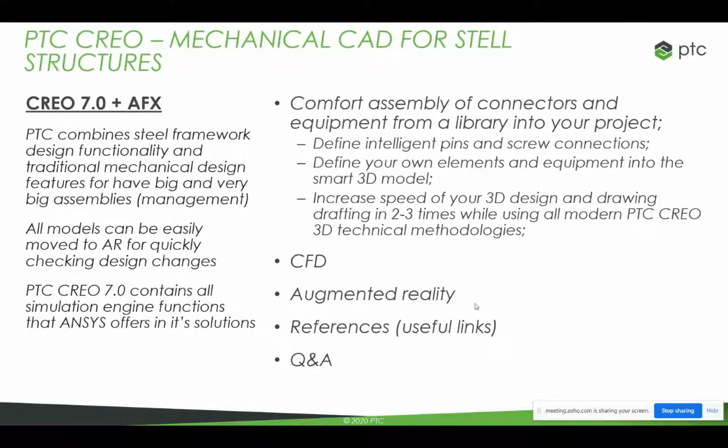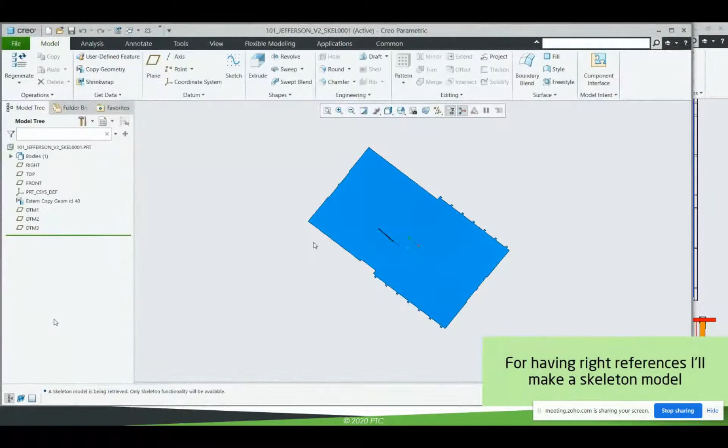Again, what you can see here, you can see the building layout. Let's suppose I have it from one of the constructional CAD. Here, I do have a quite tight or close equipment configuration scheme. So I have equipment on the floor. I have the stair, which I want to use, and I want to make an additional steel podium, which will be like the next step for people who are going up to the first level of this stair. Actually, that is a very large assembly because it contains more than 1,000 parts in it.

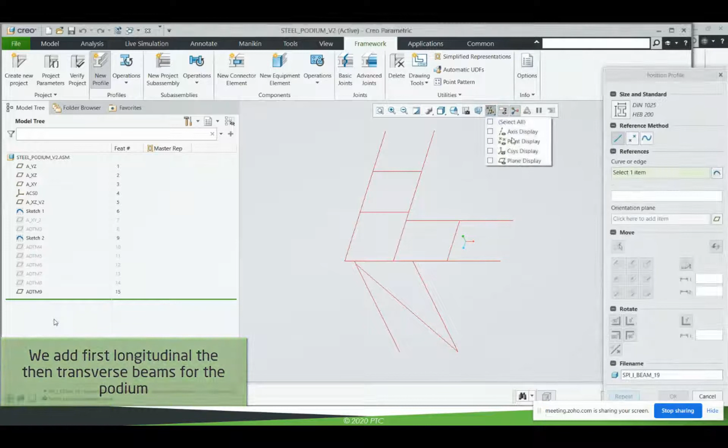And in Creo, PTC included a special design technique, which is called top-down design. Actually, we are working with the skeleton. But again, we will come to this a bit later. Here, I start to work with my podium. As in any CAD, I will choose some curves or sketches, as we call them in Creo. And then I choose the necessary profile for my beams. So I will have several beams for the podium.

And now I'm adding this beam while I use this special extension. This special extension you can see at the top level of my screen. That is called framework, because again, Creo originally is a mechanical CAD. So here I'm adding some extra lines. Again, this stuff is very similar to...

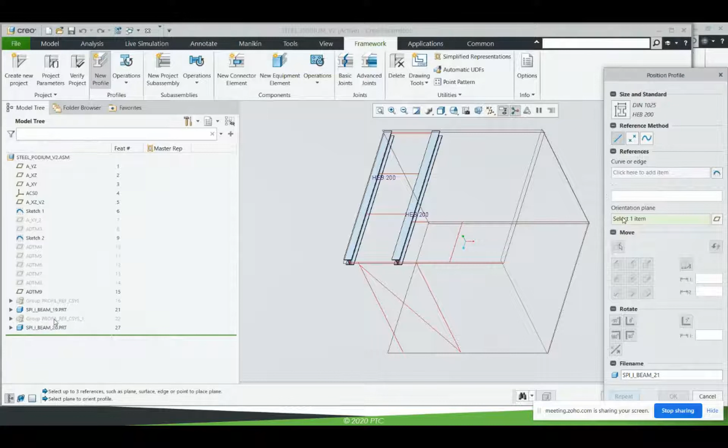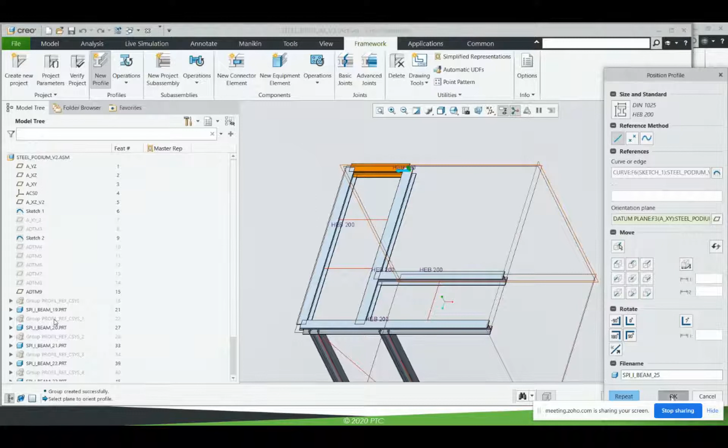We have a special principle in Creo, because we believe that as a mechanical designer, I must have the exact geometry. What am I doing so far? I am just adding beams here. I will do this for the full podium. Again, I have I-beams for the longitudinal directions. After that, I will add some transverse beams or channel beams to have them together.

The trick here is that everything Creo does for you on the screen, it does like you have it in reality. So it's not like a beam representation. Yeah, we do use curves, we do have some beams, but we will have the true geometry like it will be in reality.

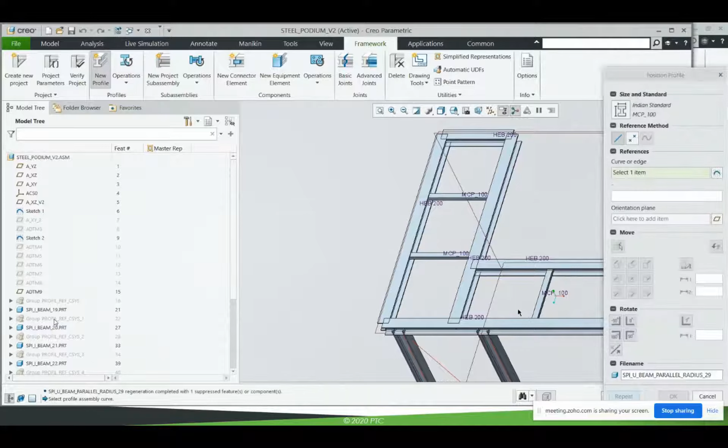For example, now I'm adding this channel beam. Once it's done, I will have the full geometry together with parameters. What does it mean for you? It means you will have the geometry like you have it in the real project. If something intersects here, it will intersect in reality.

Like now, for example, I am adding the diagonal beam, and you can see on the screen that it intersects with some of my I-beams. It will happen in reality.

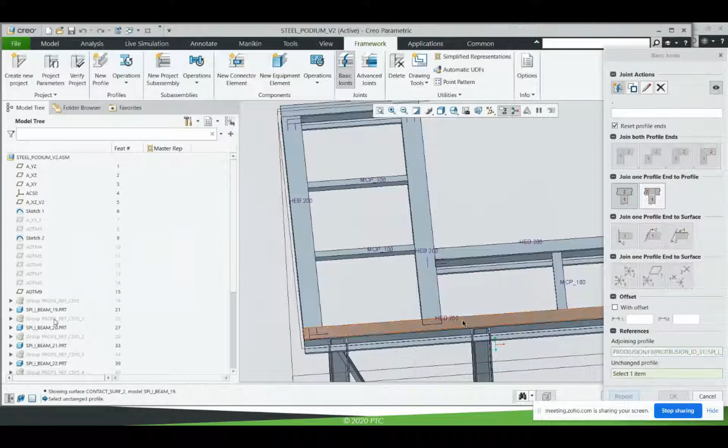So now my job first is to make joins, and then I will add several connectors here, like special steel construction elements. So far I'm adding joins here. After that, I will add some fixes or screws and nuts here. Again, we will see how Creo can work with these connectors.

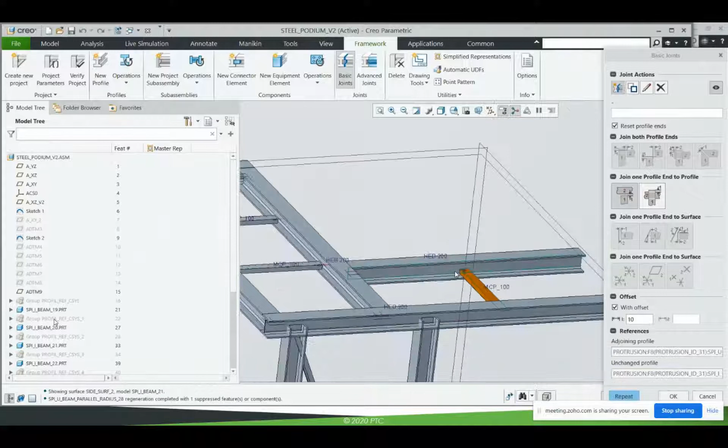Because my aim is to have at the end several drawing tables which will let me know how much raw material will be used, what kind, and what cuts have to be made on the manufacturing floor, on the constructional side. In order to have this, I must have the true geometry, because everything on the drawing for the orders to our suppliers will be automatically calculated based on our design project.

So far, I'm adding joints. Actually, it's not the joints, I'm aligning my channel beams with the level of my I-beams.

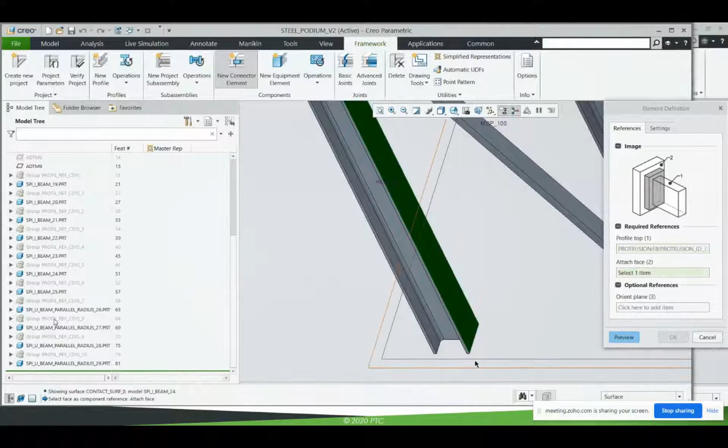Again, I am going to have a podium which will not be alone on the shop floor, but integrated together with the stair, and it must not intersect either with the stair or with some constructional parts like constructional beams. And again, it must go slightly above my equipment, because I want this podium for service purposes.

When I'm adding these connectors, you can see how Creo works. I'm placing the right surface for intersections, and Creo just makes the necessary corrections for the beams, and it's adding all kinds of these connectors.

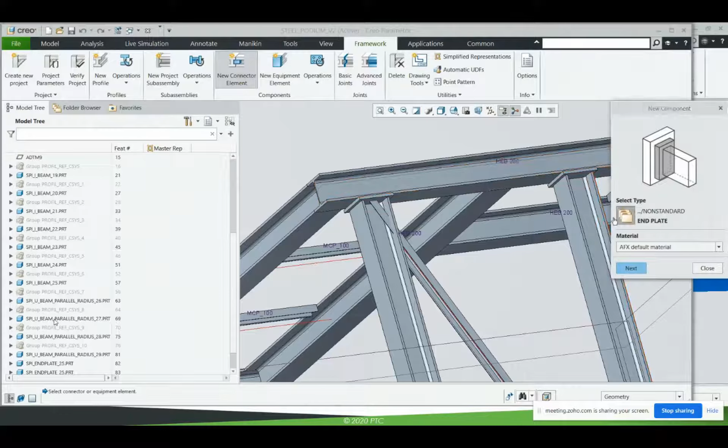So it's done by Creo itself. It calculates what kind of geometry you will have at the end, and it makes for you the full 3D modeling, which is like having the real podium when people will start to build it.

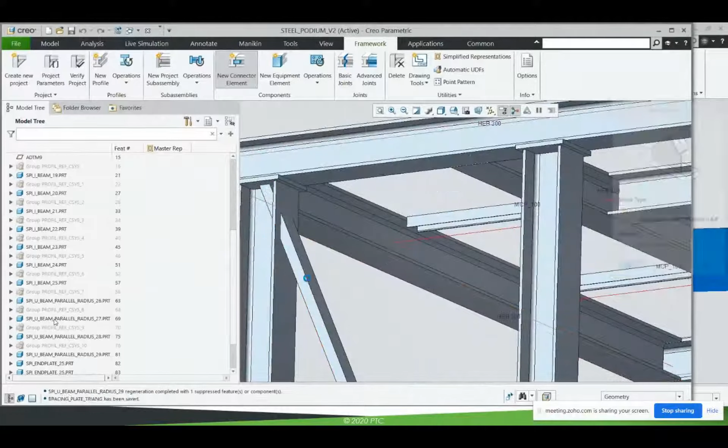Again, I am choosing special connectors for my diagonal beam from one side, and from the left side I am doing this again. So it looks like I have everything in terms of the connectors, at least for these diagonal beams and transverse beams.

What I am doing right now in Creo is choosing a layer which I have automatically, because as Creo, as AFX, added these connectors, it's also adding all necessary points for my screws.

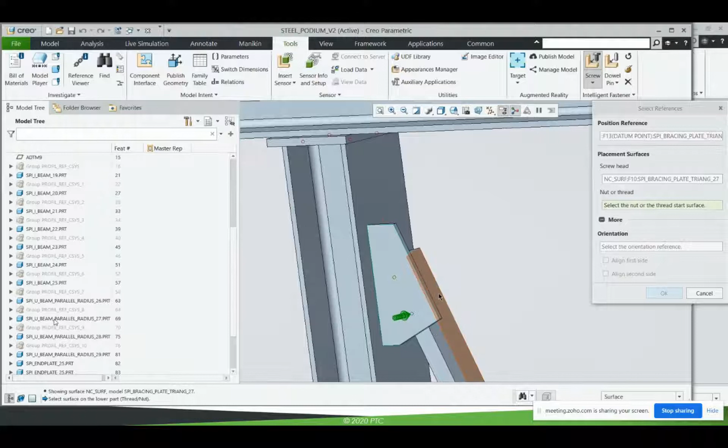What I am choosing here: I am choosing one point, and two surfaces, from one side and from the other side. I am choosing from the library the necessary screws, and Creo does the rest of the job for me. So it makes the holes, it places the screws, it places nuts.

So all of these are real models, not just a representation. You will see how this stuff can be used afterwards when I go to the drawing and the BOM management. But so far, please just note that all the geometry, all the models, were modified.

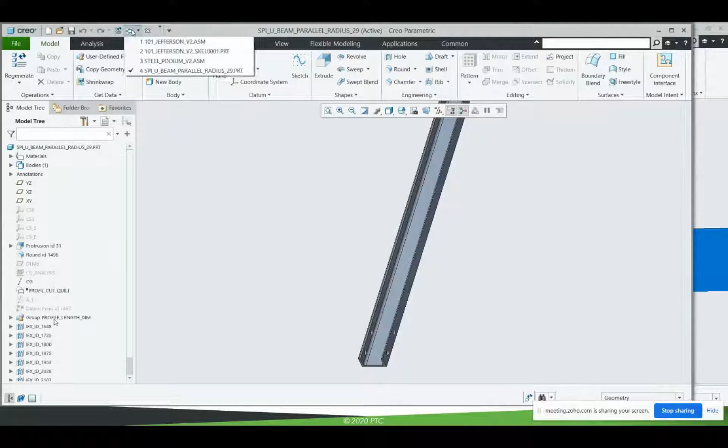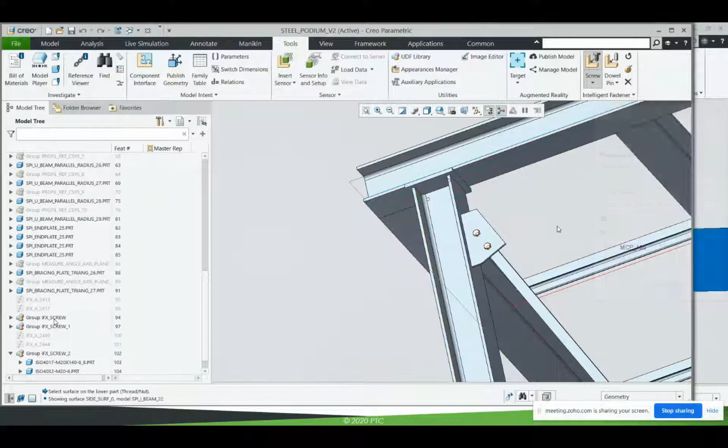So as far as I placed the screw, Creo made a hole in both parts, and I have this as a model for the screw, with parameters like the name and the library specification. By the way, if you have your own libraries, like your internal enterprise library, they can also be inserted and used by Creo, but everything is added in terms of screws and connectors.

I added also some screws and nuts for my beam. And now I want to have some additional connectors which would connect my transverse beams with the longitudinal beams.

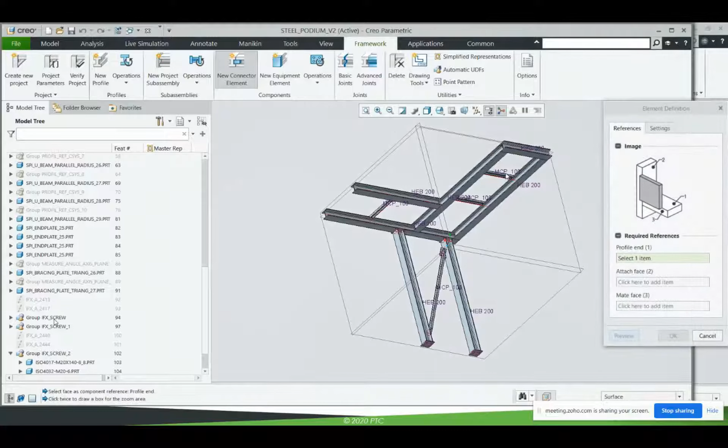What am I doing here? I am using the same approach. I am selecting the right surfaces for the placement. I select the right specification for this joint, and now I'm just repeating this connector to the other parts where I need it. Besides that,

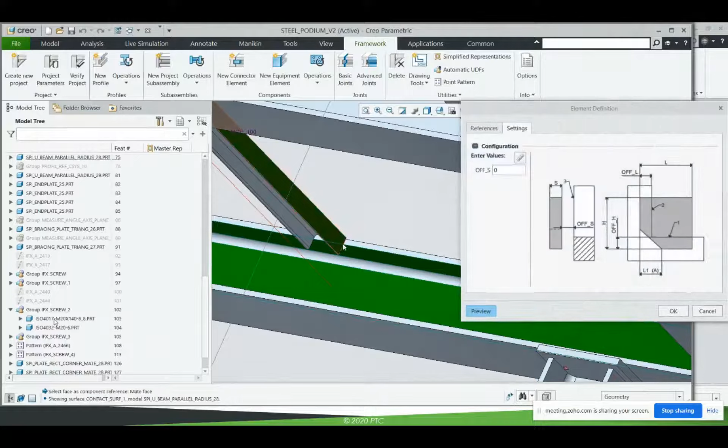in the same way, you may have weldings in case they are used in your projects. So far, I'm not using any weldments directly in my podium. So I will add these connectors for the transverse beams, or for the channel beams. And then I will go to the connectors for the longitudinal beams, because there is something interesting that I want to show you about how Creo does it.

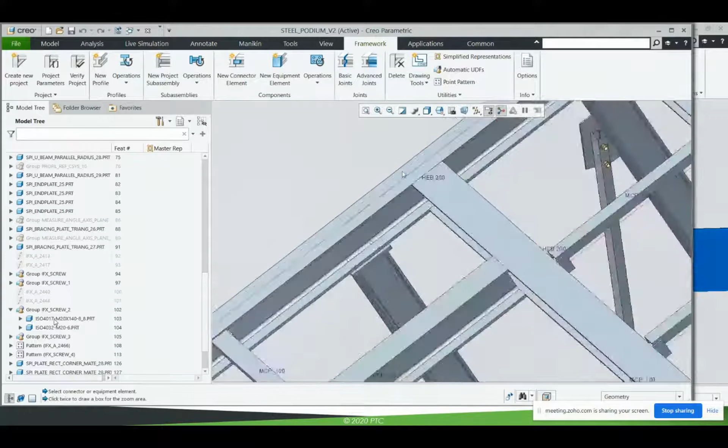Again, I need a special connector to connect these longitudinal beams. I select it from the library and select the exact placement for this. I select some screw size and hole distance information, and please notice what Creo did so far: it extended the beam up to the right position, as it should be in reality. This means I will have on the drawing the cut length table, and Creo will calculate all this stuff and include it there.

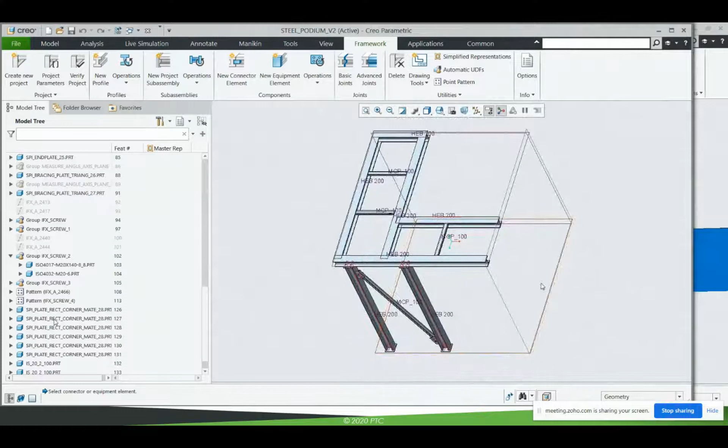That is the advantage of the full 3D model instead of, for example, some kind of geometry representation for the beams, because everything that you have here can be and must be used when you go to your manufacturing floor. It will be used for the calculations of raw material and necessary stock information. So everything will be used from your model. That's the main paradigm behind Creo: first, you do the full 3D model together with parameters.

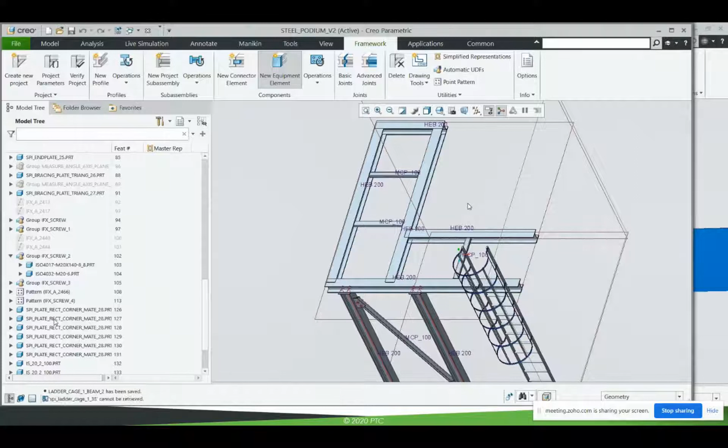So far, by the way, I'm adding here some kind of equipment. I want to have a ladder, so I place it. And now I will add the cage for this ladder, just to make it a bit convenient for the service people who will use it afterwards. As long as I have it in the 3D model, please notice on the left side of my screen that everything is added as parts and sub-assemblies also. So I'm not just having this kind of geometry; I have it as a full information object which can be managed afterwards.

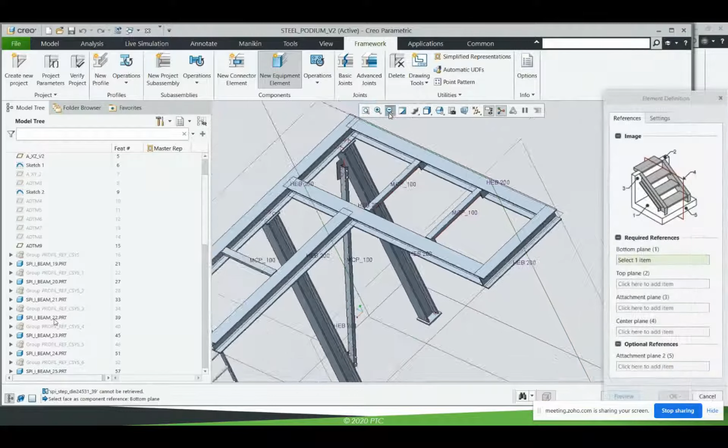Just imagine, so far I'm placing my stair. I need a datum for this, or the plane where I will have my stair. But in reality, it will not be just the stair. It will be a sub-assembly that will be used for all your next steps, like making some drawing, purchasing this stair, or making a manufacturing order to produce it. So it must be a sub-assembly, placed with some rules in your project.

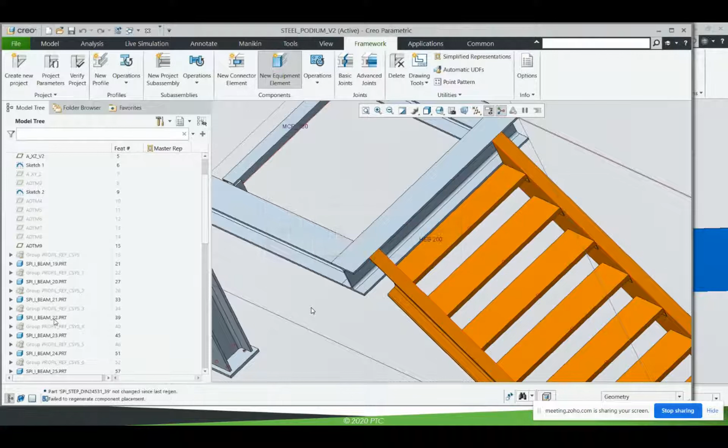Here you are not the one who has to think about this all the time, because all this work is done for you automatically by AFX and Creo. When you do usual mechanical design, for example a reciprocating engine, all of this work is done by a designer. Here, AFX or framework design in Creo does it for you. For example, here I am not really satisfied with the steps length, so I am changing it, and AFX in Creo rebuilds this model automatically. By the way, this procedure

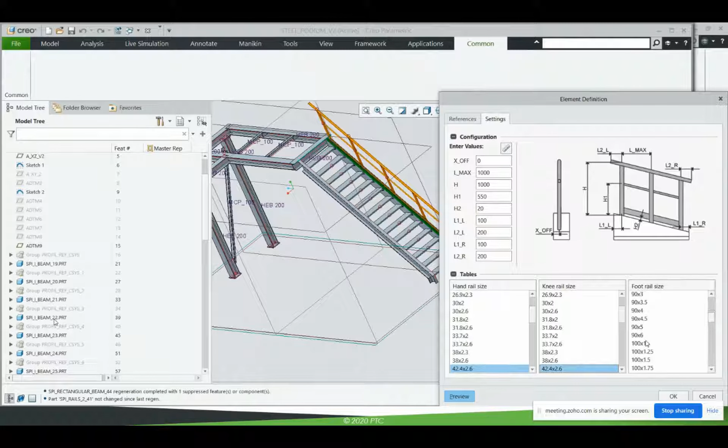is named in a special way, and we call this regeneration. So whenever something is added to the project, Creo regenerates it, or recalculates all this stuff, because again, the main paradigm here is to have the full 3D model like it will be in reality. So if we have to make a cut for the beam, it should be modeled. You must have intersection between some beams, but you must not have any kind of intersection between, for example, your framework design, between this podium and some kind of equipment.

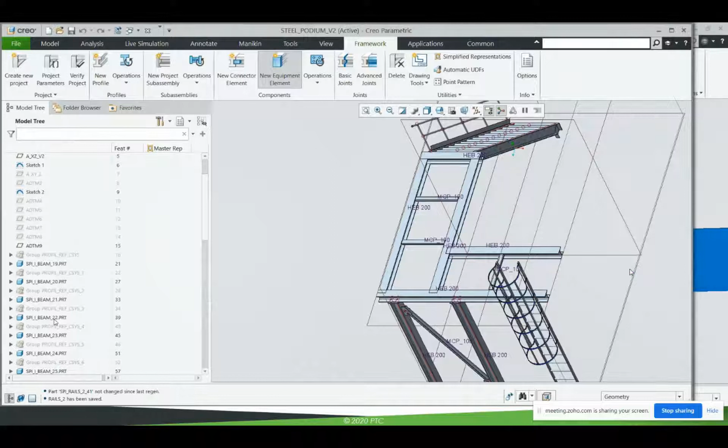So we manage all kinds of information like this, because I'm managing the information between podium and equipment through my skeletons, and AFX manages all this stuff for me in terms of the intersection that must exist. Because in order to connect the longitudinal beams together, like here, you must have the exact length of this, and you must have the cut table in order to make it.

So far, I'm adding the rail on my longitudinal I-beam, and it seems like I did everything. So I will not place any plates on top of this, but I want to go back to my project and see if it does not intersect with the other parts.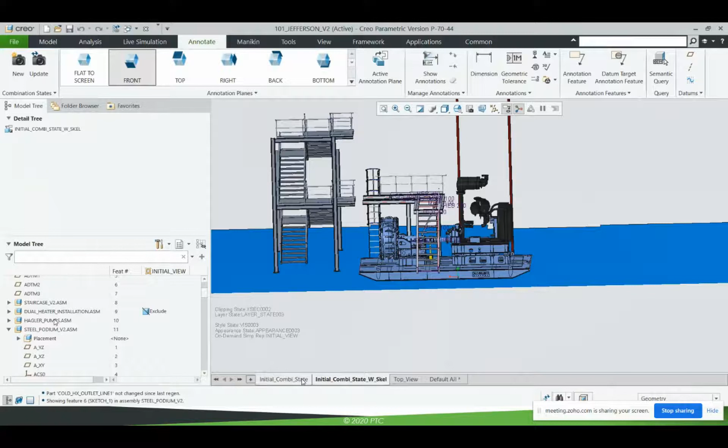As you may notice here, I am still using skeleton. Skeleton is just the floor internal configuration with some necessary stuff. So far, I am changing the place of my section just to show you this the right way.

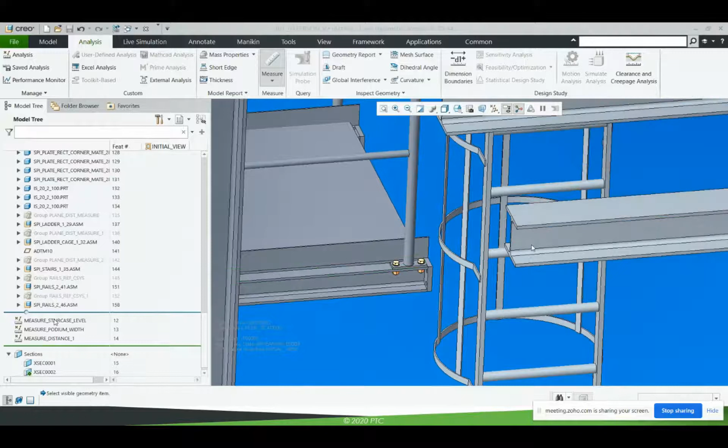My next task here as a podium designer is to be sure that it is aligned with my stair first level. Here, as you see, I do have two different types of beams. For the stair, it's elegant small beams, and for my podium I used a bit more strength, but I want them to be on the same level. That's one of the tasks for a designer when you do close integration between your steel framework and your manufacturing equipment, because they may be placed with required tough tolerances.

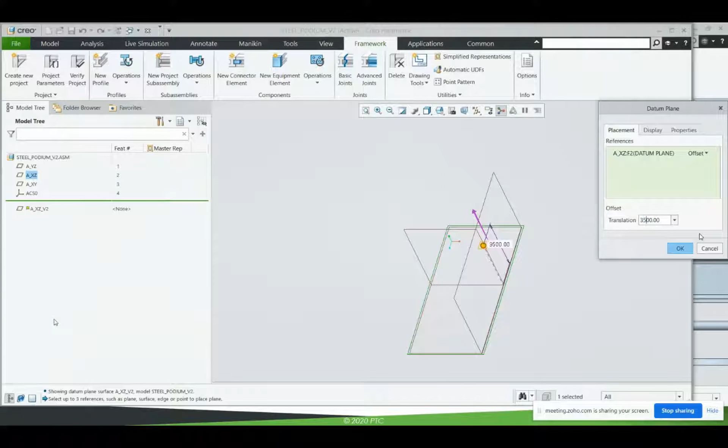So here, first I need to check the right distance between the planes. I did it, and everything I have to do here, I just do the correction of my sizes. Actually, I just place minus the exact distance difference. If I am a bit paranoid, I can check it afterwards. By the way, I want to be open. And here Creo does all correction for you.

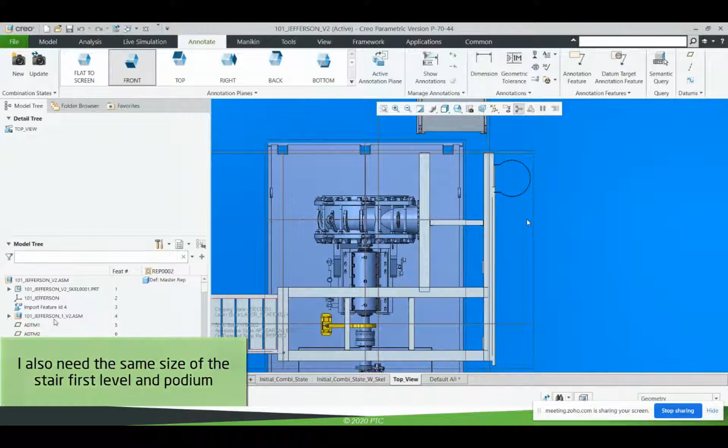It means that here I moved to the assembly level, to the full manufacturing floor assembly level, and I have to do a couple of additional stuff here. Besides these planes of the first stair level and my podium, I want them to have the same width.

So I'm returning back to my project, and on my sketch, which was used from my first step, I'm just changing this width. It means that everything - the stairs, the ladder, the beams, the connection places - will be changed, and they will be fixed automatically.

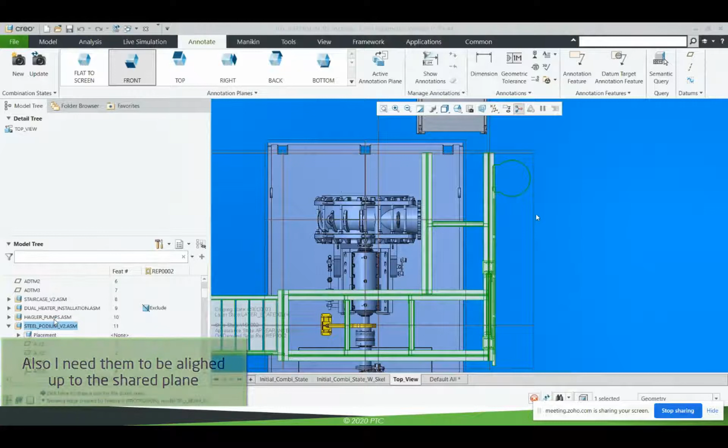That's the power of parametric CAD. That's the power of Creo. As long as you placed it the right way, any kind of changes is done automatically.

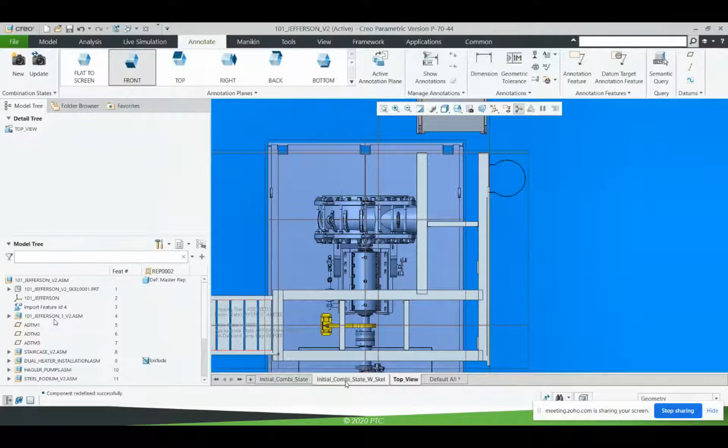So Creo can't be compared with other CADs in terms of the speed of changes, because here you just spend a couple of seconds for any kind of changes - that is what PTC calls the true parametric models.

Again, it looks like everything is finished here. So we made structural framework steel design - sorry, we placed it here. Everything is placed the right way, and we don't have any kind of intersections.

By the way, in order to exchange this model between, for example, a construction CAD system, we do have special formats, but I will describe these at the end of my presentation. So this model again can be exchanged with any part of this.

So we can exchange only the skeleton or the floor configuration. We can exchange only the podium itself, or we can exchange podium, stair, equipment, and some additional stuff. It depends on the task that you perform for the structural design.

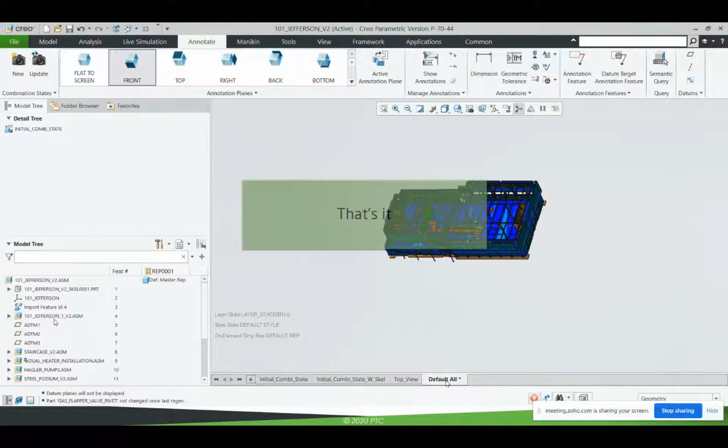Again, let me continue with my drawing. So, what have we done so far? We've finished the podium. The podium is placed in the right place, and it's aligned appropriately with the equipment and the additional steel framework design.

Now I want to have all kinds of manufacturing information for that. How can I do it? First, I'm moving back to my framework, and I'm adding all kinds of project parameters.

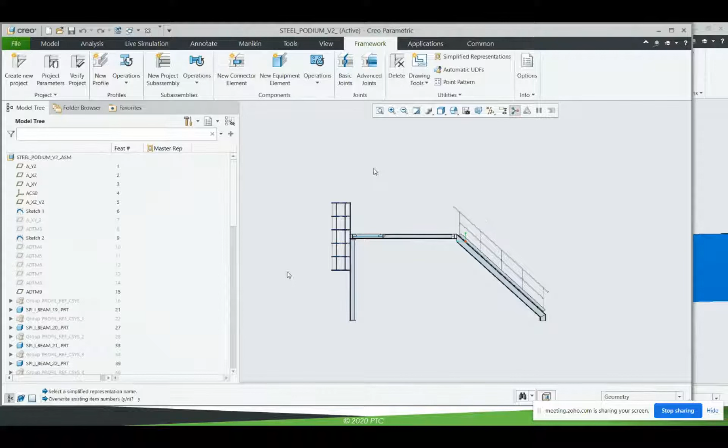What kind of parameters do I mean? I mean all kinds of prefixes that will be used for the beams, like parts or assemblies - like PM or assembly stuff. I will add the rule for how Creo will make the numbers, what is the start, and after that Creo changes all kinds of internal parameters.

Nothing was changed in terms of geometry, but the geometry content was just filled with the right names for the parameters. Here's how you can do a drawing in Creo.

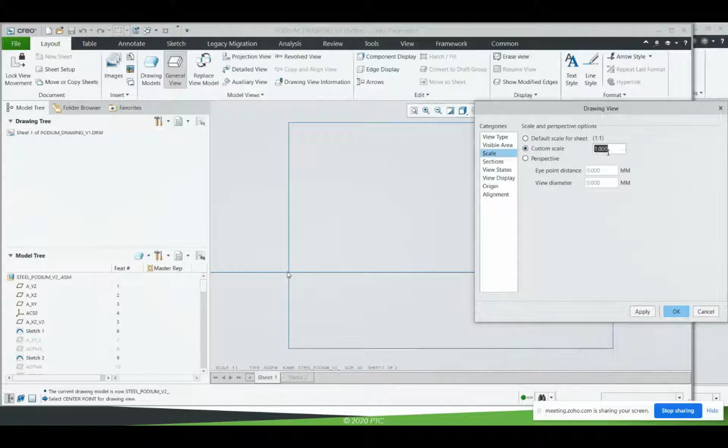Just remember that everything is done from the model—imagine the model behind your screen. That's the same paradigm used in Creo for drawing. I place the view like I see the model, and I can change the scale or other things, but I use this view as the initial source because it's not the view, it's the model itself, the podium model, for any kind of BOM information.

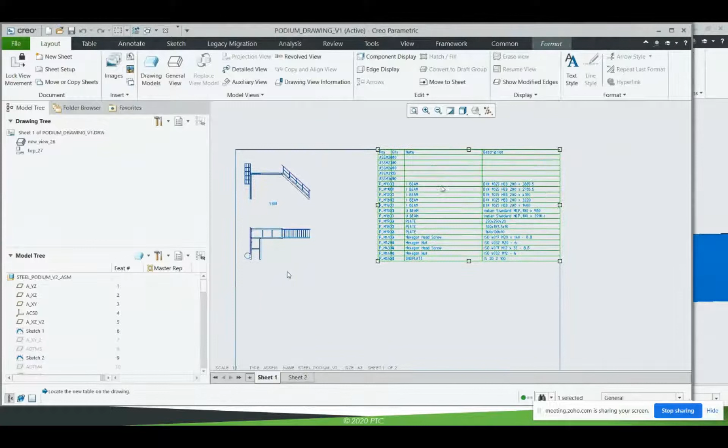For example, here I'm using one of my prepared tables. Usually that's good practice, to have some of your tables for the bill of materials, for your BOM. Here I change the width, but actually this table isn't right and I'm going to fix it. What's necessary here? First, I only need parts, so I'm not going to count the number of assemblies—I just need the exact part number, how many beams, how many plates, how many screws, and so on.

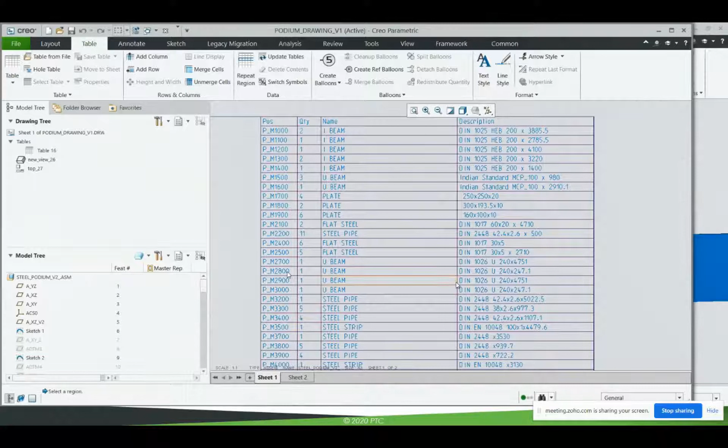In Creo, everything can be done through this special function—we call this a repeat region. I'm adding some script here so that I only get parts in it, and Creo shows me only parts in this table. So, for example, I have here my defined prefixes, and I have here the numbers.

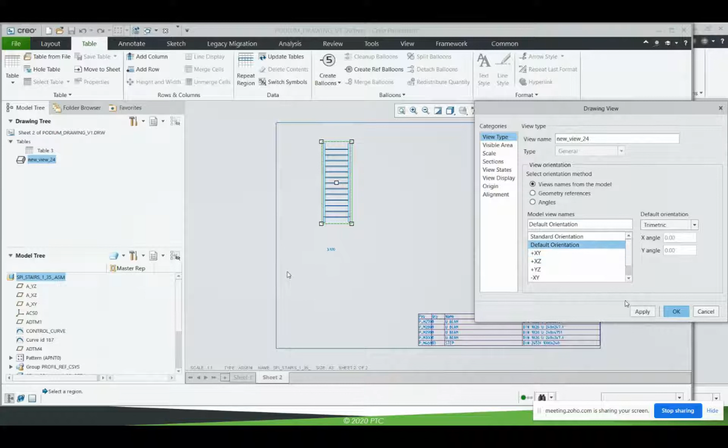If I go to the second drawing, here I want to have some BOM balloons for my stair. In the stair view, I change it to be isometric. And here I want to show you how much time you'll spend in case of doing some BOM management, like BOM balloons.

So far, I am changing again the width of the first table, and then I can go to my properties in order to have some special BOM balloon marks. I go to the properties, and here I choose some of my prepared BOM balloon symbols.

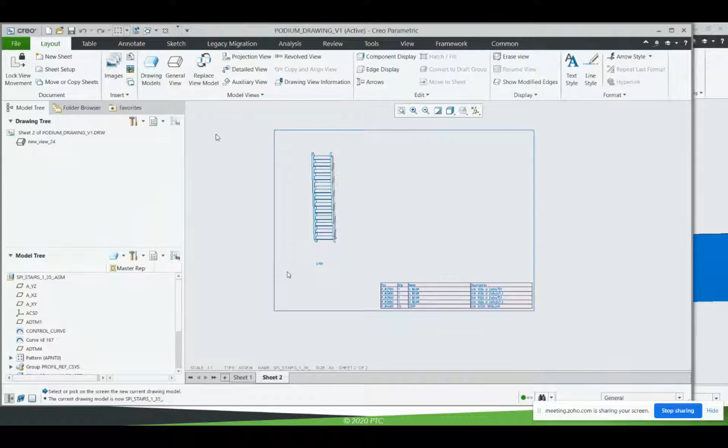Again, I am selecting the model, which is just behind the screen, because I will calculate—Creo, to be sure, will calculate all the stuff based on that. And here I add the BOM balloons just by selecting the table and the view.

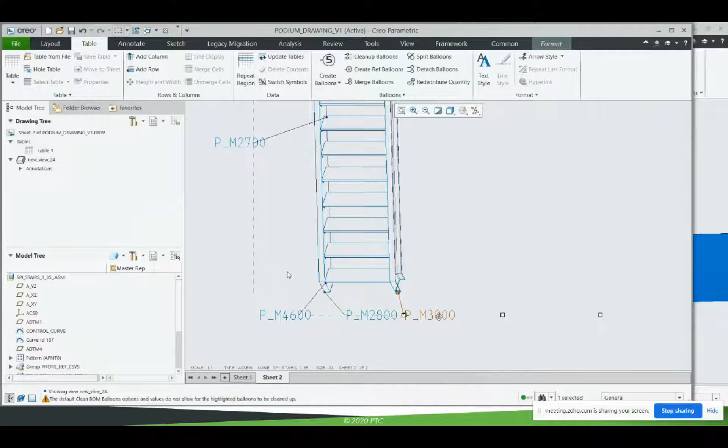That's all—every other step is done by Creo. Creo calculates the right placements for the balloons. It allows me to do some graphical or aesthetic modifications for where I place this information. Again, all this information is taken from your 3D model, which means you have no chance to make a human error here. You're not just placing the BOM balloons—Creo places these for you. You're just controlling where you have this information.

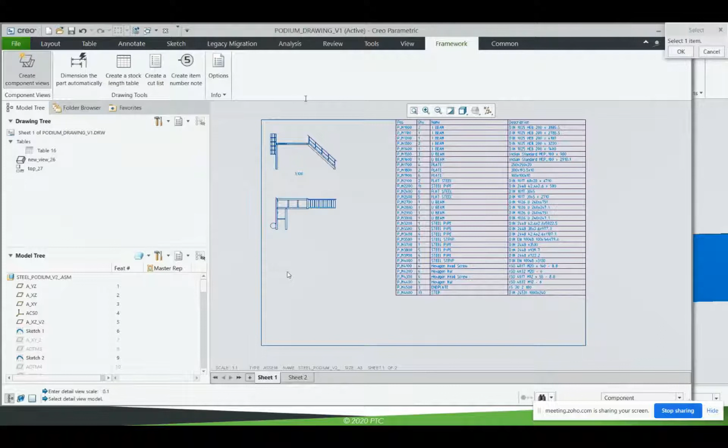Besides that, I want to show you how you can use some special AFX functions for your drawings. For example, I need a detail view for my first component—you remember I added this at the beginning of my presentation, for some of the legs on this podium. Here Creo places this, and we have a special function to make all kinds of dimensions here. Again, any of these dimensions can be changed.

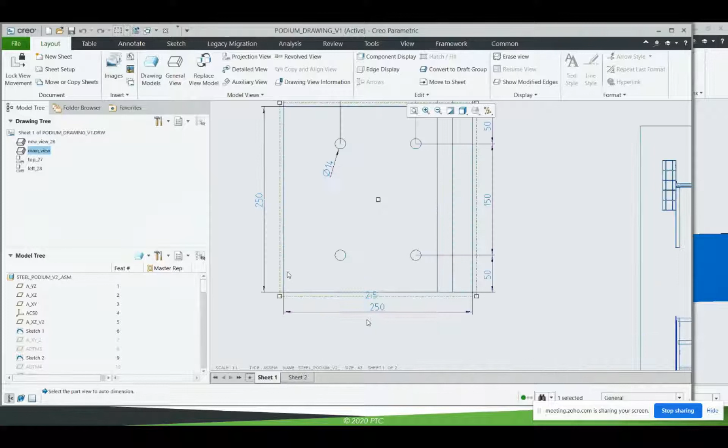For example, so far I want to also change the scale for this drawing view. Maybe it's not the best place for this detail view, but for this demo I'll place it here. So again, everything is taken from your model—I'm not placing the dimension on your drawing. I have it inside the model of this small plate, and I have all kinds of manufacturing information, or rather, the information required for manufacturing drawings, also inside the model.

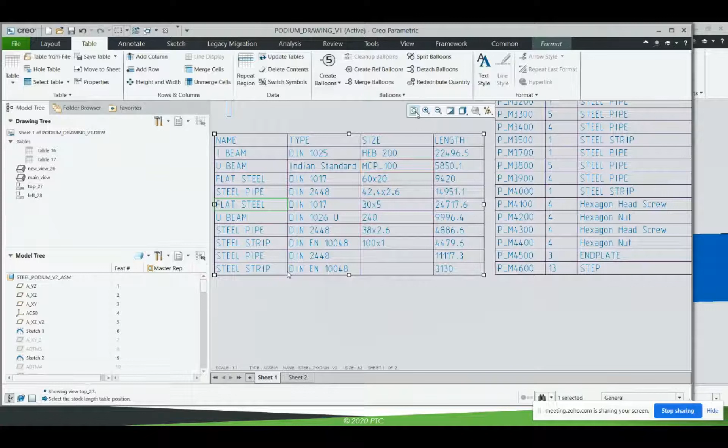So far, I want to have here a stock length table, which is one of the special functions inside AFX. Here I just click on the view, which represents my model, and I get this table. I'm placing this at a convenient point on my screen, and here Creo automatically calculates the length and other details of the raw material.

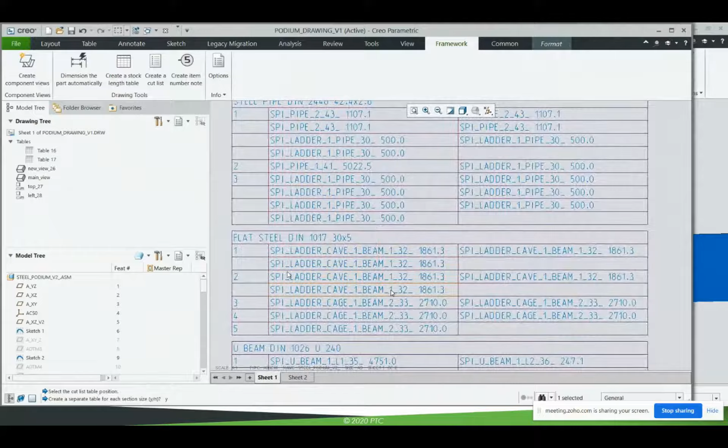Also, I want to have a cut list here. Do you remember the connection, the connector between the longitudinal tables? I want this to be taken when I generate a cut list. Again, I just place the right model, and Creo calculates all this automatically. So you have the stock length table and the cut list based on your true geometry.

So you don't do it manually—everything that can be calculated by a computer should be calculated by a computer. Mainly, that's it for the structural framework design.

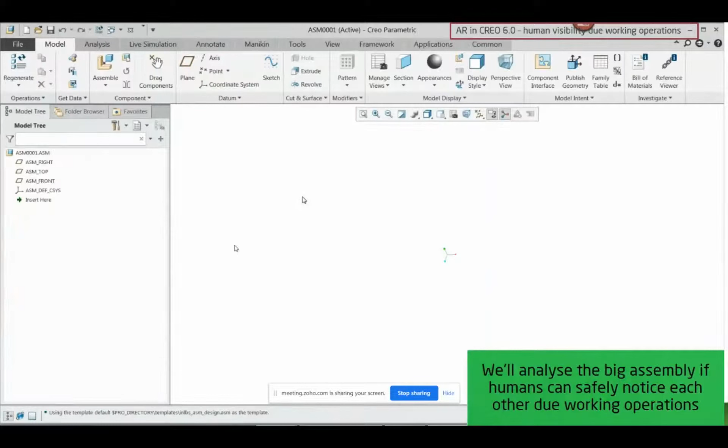I'm starting another video to show you how you can move your models to augmented reality. You've probably heard a lot about this, or maybe nothing, but one of the quickest ways to share your designs with customers, or with peers you work with, is augmented reality. What does it mean?

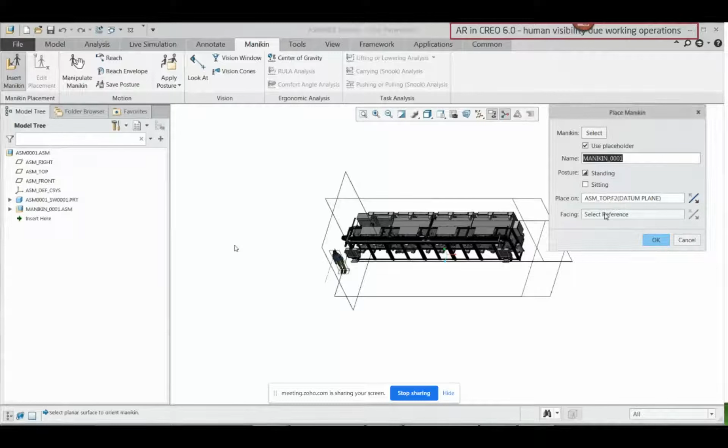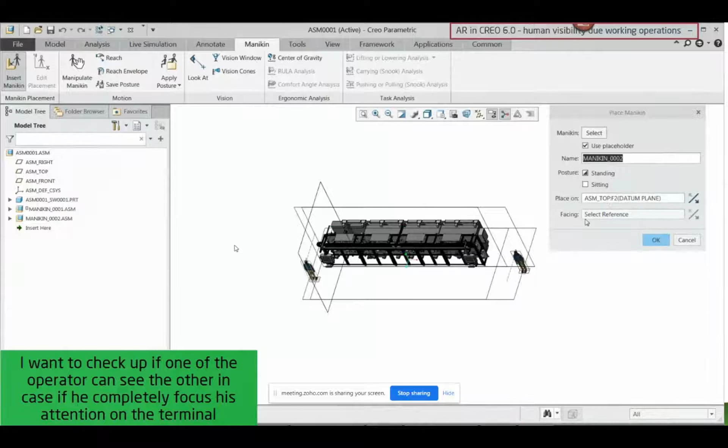For example, I have a big assembly which might be or must be closely integrated with other stuff. Here in my example, I'm using manikins or manikin assemblies to ensure one man can see another, his neighbor, in case they work together on the same equipment, just because of safety requirements.

To do this, you can use some kind of calculation tool. You can simulate this, make some views, go into your model, and try to imagine how these two guys will see each other in 3D. But the most effective way here is to use augmented reality.

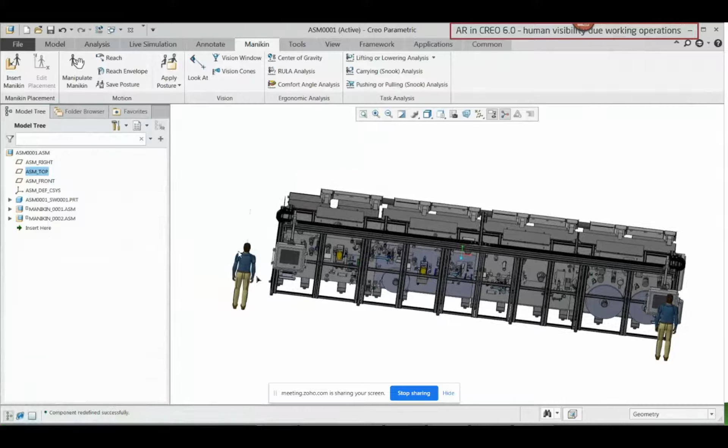Everything which is placed in Creo can be moved to augmented reality without any kind of disturbance for the designer. As long as you have your model in Creo on the right version, you can check it this way, for example, so this guy can see the screen. Let me go a bit forward in my video.

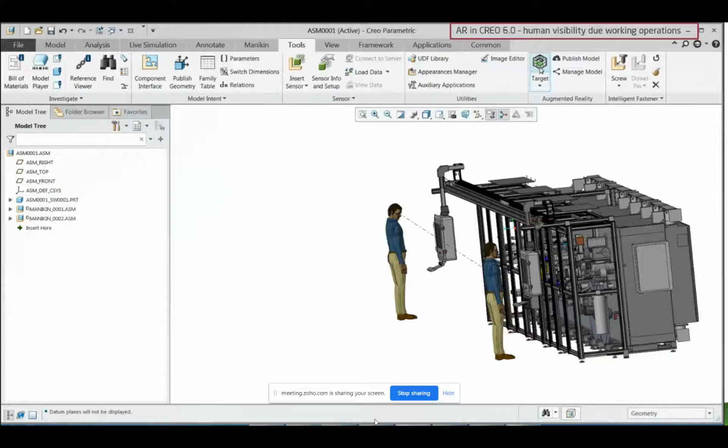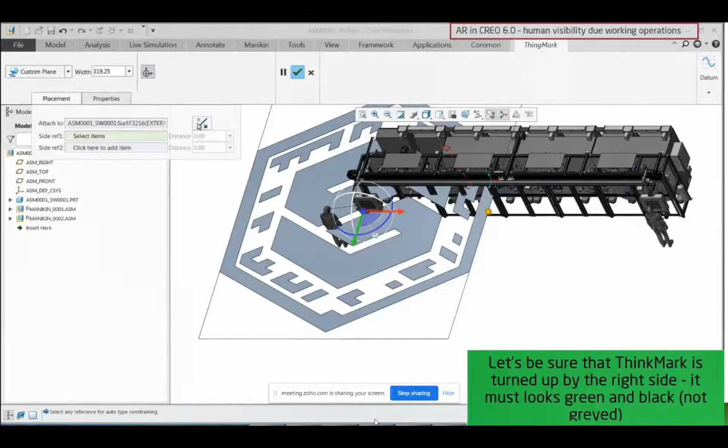You can place it on a special link to the external ThingWorx server, another product from PTC. In Creo, you don't bother about this because all the stuff is done for you automatically. PTC uses its own server to give you access on your mobile devices, or for your peer or your neighbor in another design department, on his mobile, to see everything which is already done.

Here I place the mark. We call this a ThingMark. If you send this mark to your peer, he can print it, and when he moves his phone with the special app, for example from the Google Store or App Store, he can see everything which you did for him.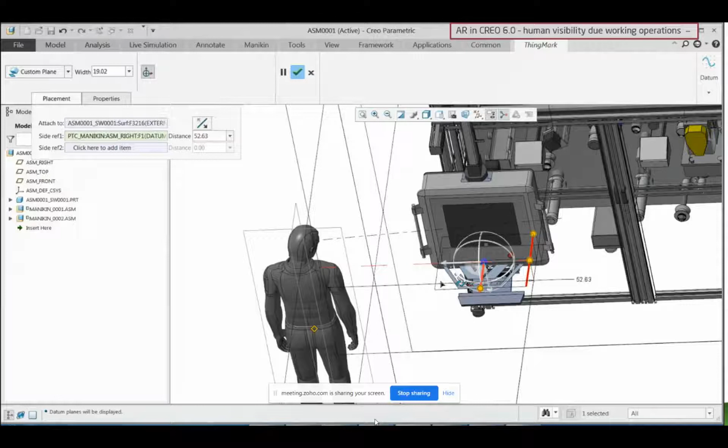The intention here is to share all kinds of complex engineering information. Yes, you won't share any kind of screw this way, but imagine you must check if it would be convenient for people to be between a podium and the stairs, or that the podium won't intersect some guy's head if he's a service guy who wants to work with this.

Or, for example, you must make a general impression for your design, for your management, or your management wants to make a report for your customer who ordered this steelwork project.

In this case, you place your model in augmented reality. You just use the standard link and send it through your mail. Here I did it for myself, sent it to my Gmail address, and used my phone. When you download this app from the Google Store, or your customer does it, he just uses this mark.

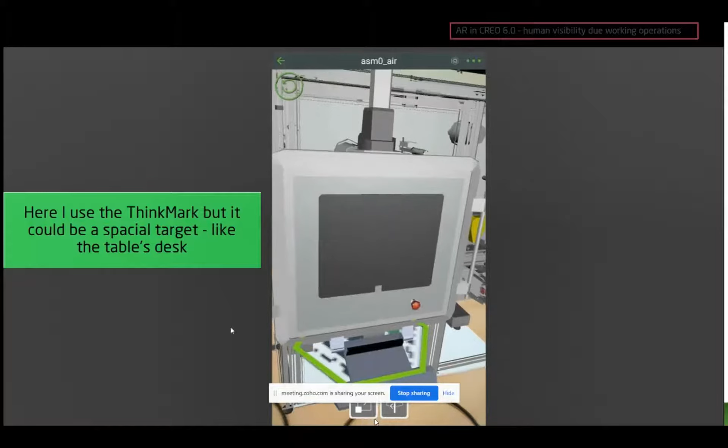It's like a barcode, actually the meaning is the same. And he can see in his mobile device exactly everything which you want to share with him.

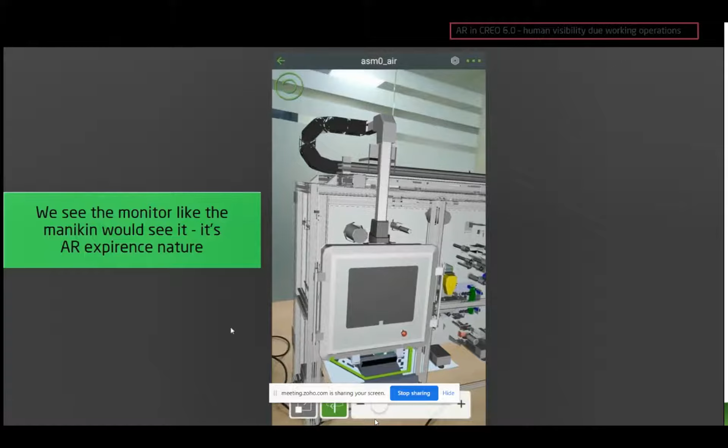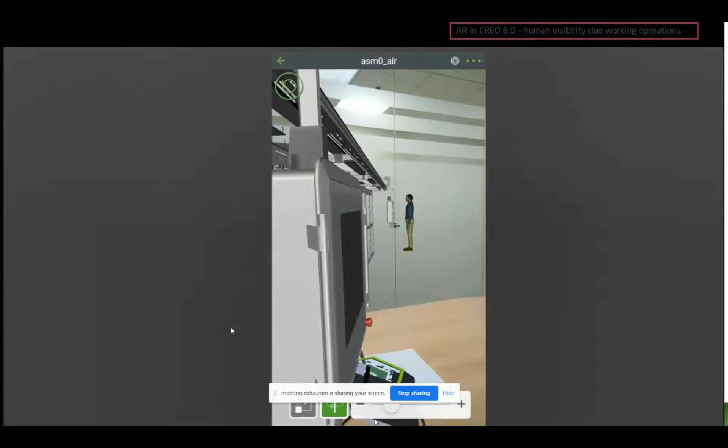Again, you will not send this model yourself, you will not exchange it. Nobody cares about how to import DWG or STEP format, or what the Creo format is and how it can be imported for some constructual CAD. Everything is shared through augmented reality, so you see it in the right scale, exactly like you see it with your own eyes. Again, that's about augmented reality.

Let me describe a couple of additional Creo features, like CFD calculations you can do here also based on your real models. I want your patience for another 10 minutes, the final 10 minutes, I promise. I want to describe my intention as a designer and show you how you can use your graphic cards and ANSYS technology when working with Creo.

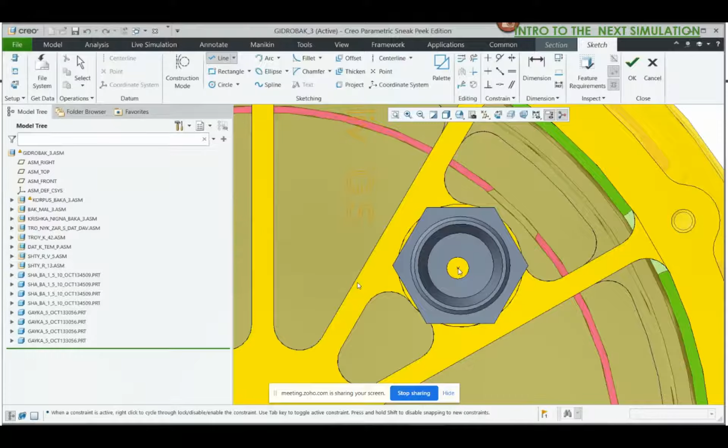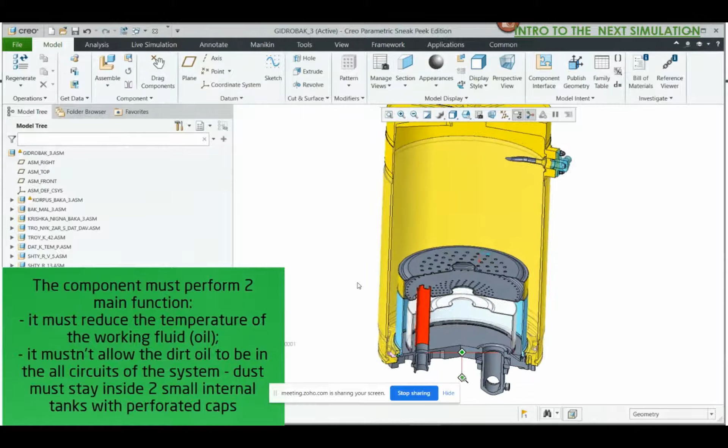So what can you see in front of you? That's the hydraulic tank that I want to check, to see if it will work or not, in terms of my internal design features inside it. In Creo, we call this design intent. Design intent is exactly the technology you want to realize and which you are modeling with the help of the CAD system. This hydraulic tank must perform two main functions, just two.

It must remove external heat from the oil, and it must not allow the oil to be mixed. So the main paradigm for the tank is that it must be like a refrigerator for the oil, but the oil shouldn't be like a tornado inside it.

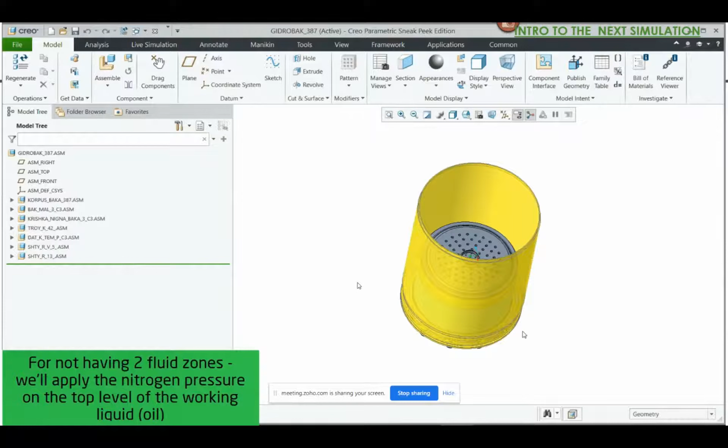And here I modeled, actually it wasn't me, but I'm taking this part here, a quite complex geometry. If you take a closer look at this bottom part, it's quite expensive, so I want to be sure that it will work. Let me start the true calculation process like you will have it in Creo, in case you use ANSYS inside Creo, which is also there.

That is called Creo Simulation Live, a special extension in Creo. Here I use ANSYS because it's much faster to get your simulation results on your graphic cards. In case of Creo, we use CUDA cards, like NVIDIA CUDA technology, which allows me to select the internal and external stuff for my flow, so I have inlets, outlets, and everything else is handled by Creo.

For this simulation, Creo will extract all kinds of internal fluid domains. It does it, by the way. Right now all this stuff is done by the same CAD core or graphic core, which worked for you when I showed you these beam intersections where I placed some connections. And ANSYS does all the other stuff for you.

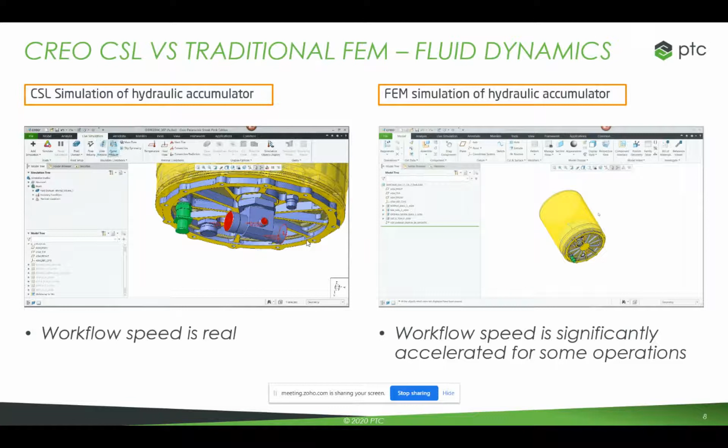It will calculate. So here I place the oil as the media, as the hydraulic media. I place here the pressure for the internal tubes. I will also add a pressure, like the atmospheric pressure, which will press all the liquid inside this tank. And of course I will add the output - that part was the output for the oil. Mainly, that's it. So I have it.

I'm also placing some pressure boundary conditions in the simulation world, boundary conditions that are exactly the physical parameters that your design will have in reality. I'm also placing some special conditions like the output pressure, and I start my simulation here. My task is to be sure that all the internal geometry, all the complex internal parts, will work for me the right way.

So here you can see how Creo simulates this live. That's exactly the reason why it's called Creo Simulation Live, because you don't have to spend hours - in most cases, you will not spend hours. Let me please be honest here.

When you do CFD calculations, I want to place some pressures and velocities, because based on the velocities and pressures I can see clearly that I don't have any kind of tornado inside my tank, because in case of any kind of tornado, this tank will not work. So I just want to be sure that it works correctly.

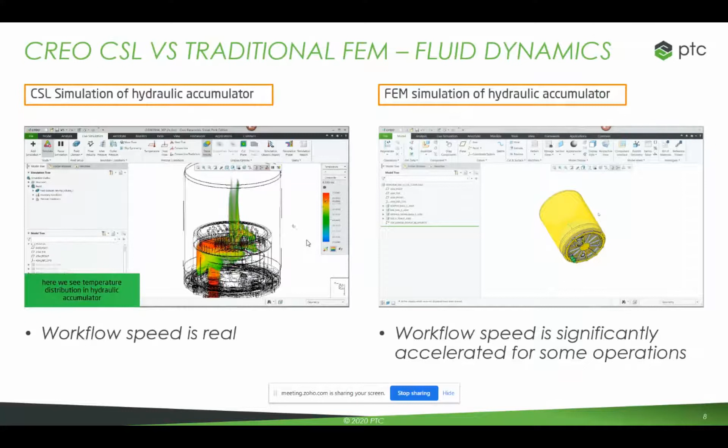Here I'm selecting the high pressure and low pressure areas. I am selecting the same stuff for velocities. I am changing the scales for my pressure results. And here I can see that my internal perforation in these plates is working correctly. So I do have some extreme pressures just inside, but I can see that all my output cavities are working correctly. So this design will work, and I'm sure of this.

And again, one of the advantages of ANSYS in Creo is that it's done very quickly. So you can use your actual 3D model without any kind of simplification, because any simplification before simulation would take you many hours, maybe some days. Here you use your design in 3D, without any kind of simplification.

Again, that's all in terms of my content. Let me please have a couple of minutes, and I am up for your questions.